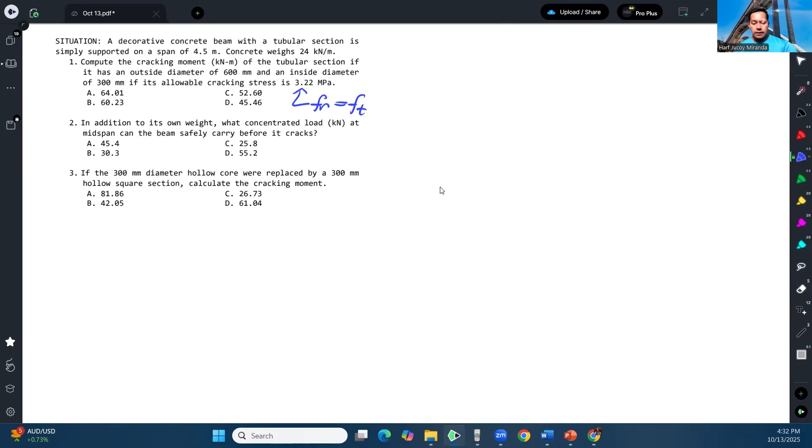Situation: A decorative concrete beam with a tubular section is simply supported on a span of 4.5 meters. Concrete weighs 24 kilonewton per meter. Compute the cracking moment of the tubular section if it has an outside diameter of 600 millimeters and an inside diameter of 300 millimeters, with an allowable cracking stress (the rupture modulus, or tensile stress of concrete) of 3.22.

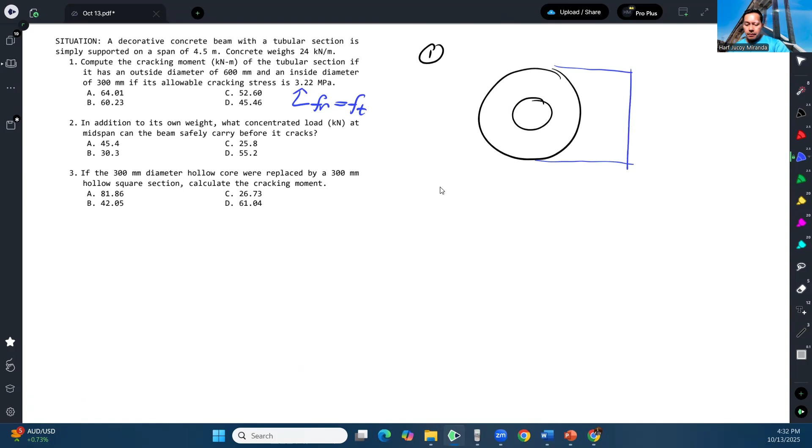Now the difference here is that our section is tubular, so it's circular but with an inner hole. According to the problem, the outside diameter is 600 and the inside diameter is 300.

So we don't need to find the neutral axis because due to the symmetry of the circle, the neutral axis is right at the center. So if this is subjected to a positive moment, the bottom part becomes the extreme concrete tension fiber, so that's our CT.

It is also logical to assume positive bending since it's stated that it is simply supported on a span of 4.5 meters. Since it's simply supported, it will be subjected to pure positive bending.

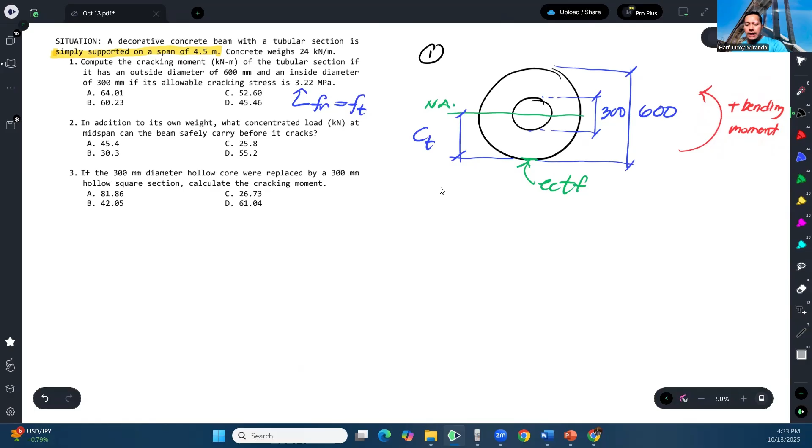So to compute the cracking moment in number 1, we know that bending stress equals MC over I. Let's convert this so tensile stress equals cracking moment times CT over I gross. For CT, it will just be half of 600, or 300.

For I gross, since these are just concentric circles, it's pi over 64 times the outer diameter to the fourth power, 600 to the fourth, minus the moment of inertia of the hollow circle, which is 300 to the fourth.

So we can now compute the cracking moment. Let me substitute directly: FT is 3.22 equals cracking moment times CT (which is 300) over I gross. Factoring out, we get pi over 64 times 600 to the fourth minus 300 to the fourth.

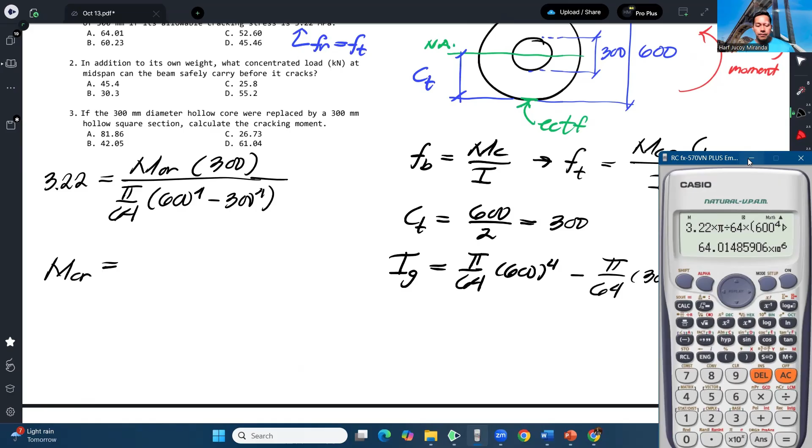From here we can calculate the cracking moment: 3.22 times pi over 64, times 600 to the fourth minus 300 to the fourth, divided by 300. This gives the result in Newton-millimeters. To convert to kilonewton-meters, divide by 1 million, giving 64.01 kilonewton-meters.

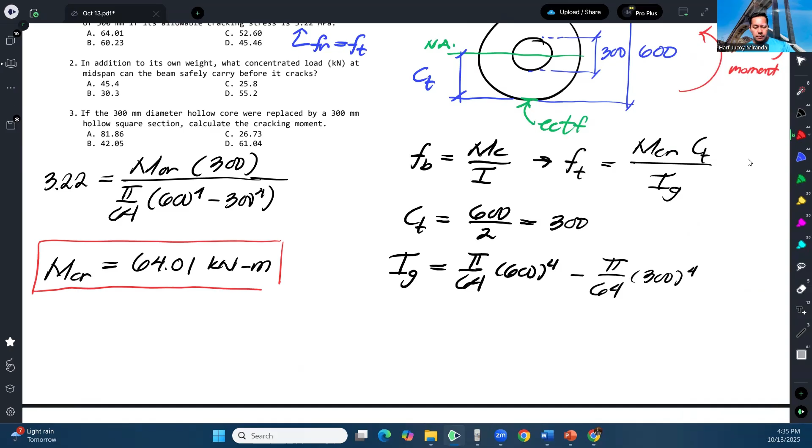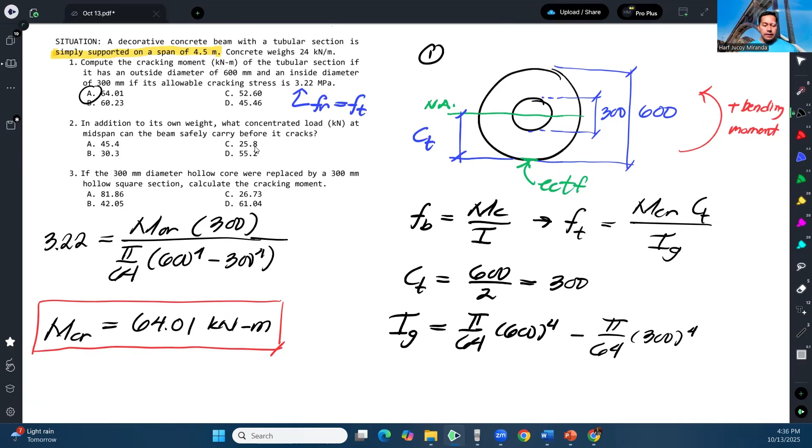That's letter A for number 1. Next: in addition to its own weight, what concentrated load at midspan can the beam safely carry before it cracks? Given data: concrete weight of 24 kilonewton per meter, and span of 4.5 meters.

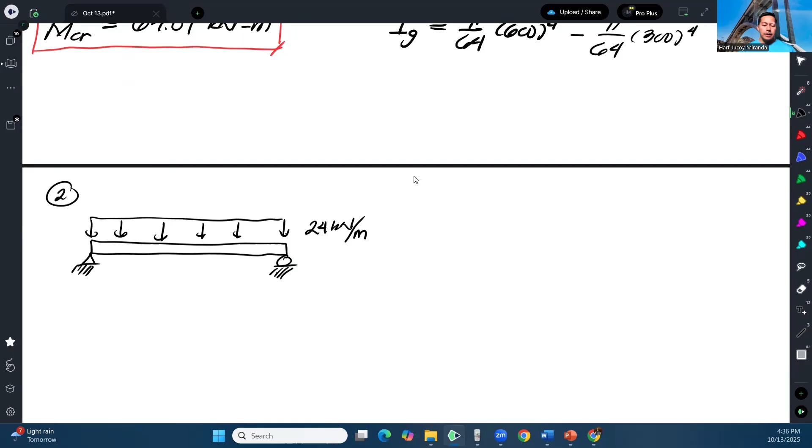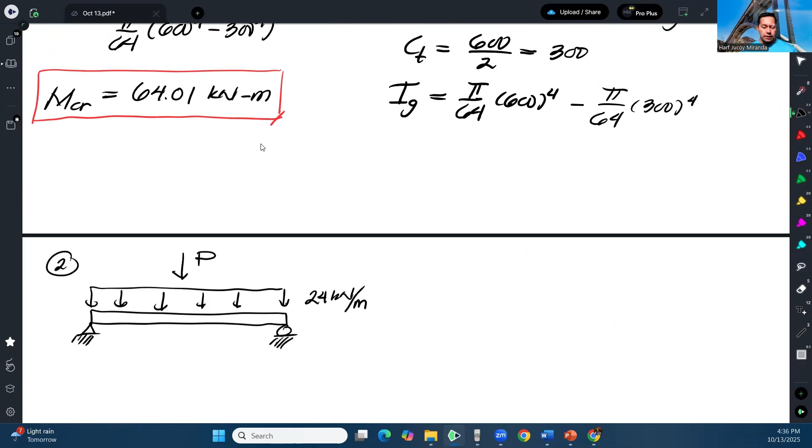Let's draw this out. For number 2, this is our beam with a uniform load applied. The question asks what maximum point load can be applied at the midspan, over a span of 4.5 meters, before it cracks.

Of course, the maximum moment will occur at the midspan. Since it is subject to uniform weight, we use WL squared over 8, plus the moment produced by P. Since P is at the midspan, that's PL over 4. So basically we equate the maximum moment to the cracking moment of 64.01.

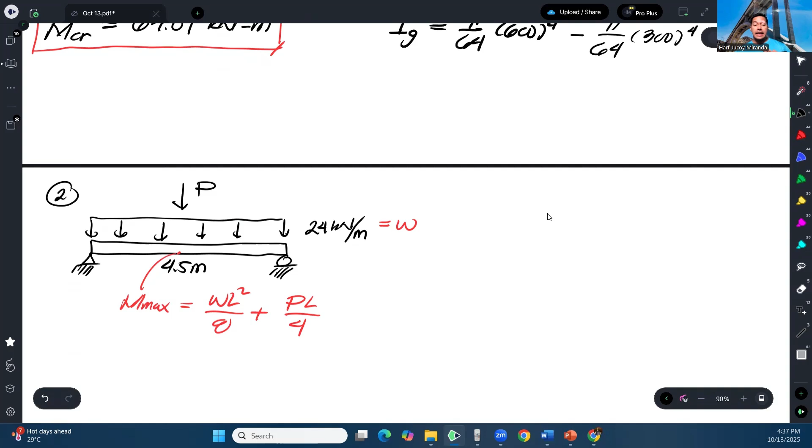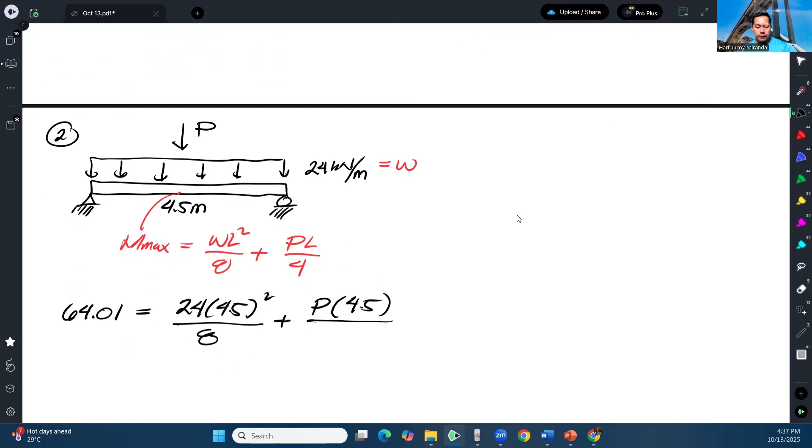We have 64.01 equals 24 times 4.5 squared over 8, plus P times 4.5 over 4. All we have to do now is solve for P.